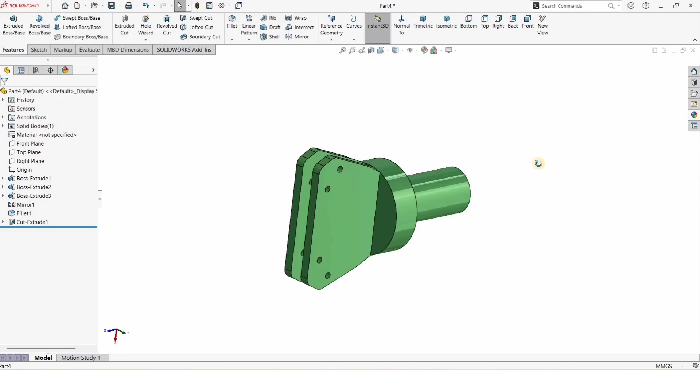Hey everyone, and welcome to this robotic gripper tutorial in SOLIDWORKS, in which we will model this part of the robotic gripper, which will later assemble with the robotic gripper as well.

So let's begin. Open a new part file, change the background to plain white, and make sure you are working in MMGS as units, which means millimeters. Then click on front plane and click on sketch.

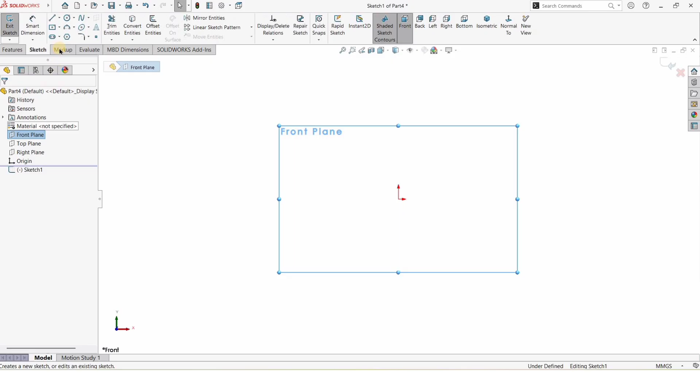Select the circle tool and create a circle at the origin. Specify the diameter of the circle as 50 millimeters. Then go to Features, select Extruded Boss Base, specify the length of extrusion as 101 millimeters, and click OK.

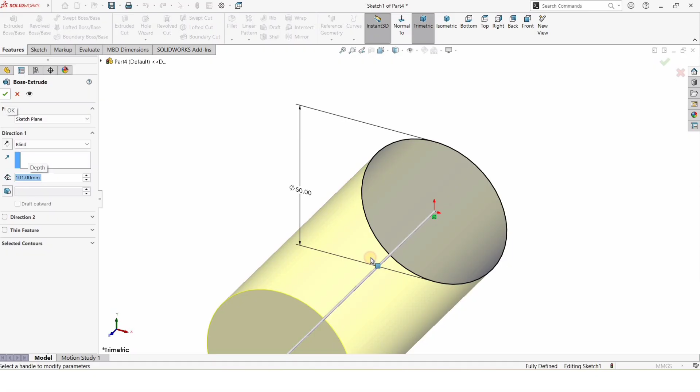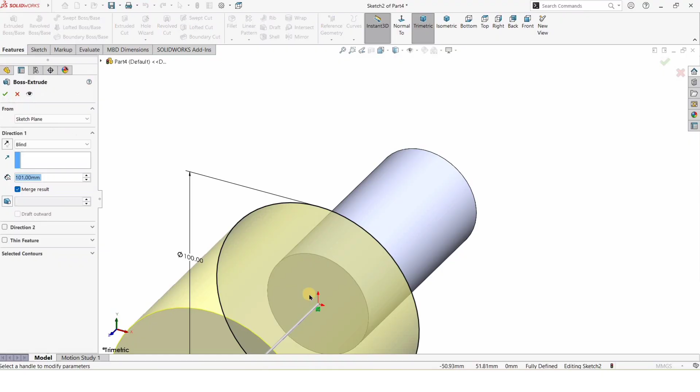Then select this face, click on sketch, and create a circle here at the origin. Specify the diameter as 100 millimeters. Then again go to Features, select Extruded Boss Base, specify the length of extrusion as 30 millimeters from here, and check this box.

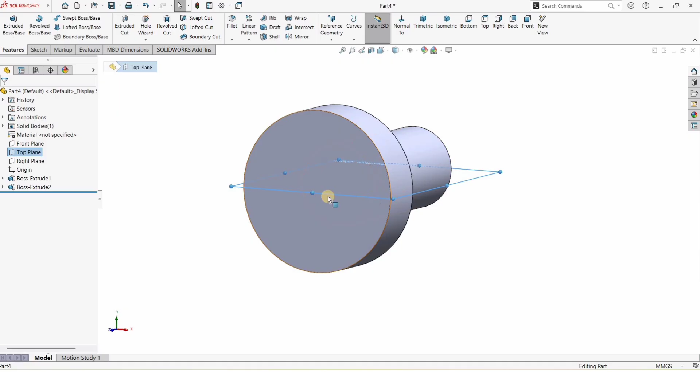Now we need a plane that cuts this part in half. Let me explain: this is the plane, the blue color plane that cuts this part in half. So right click on this plane and click on sketch.

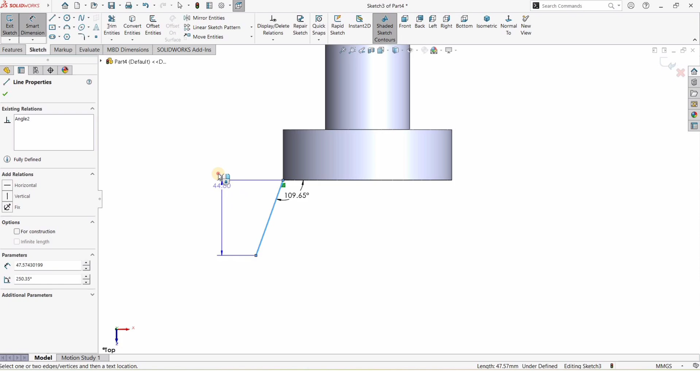I will select a line, and from this point to here in space create a line. Then select Smart Dimensioning, select these two lines, and specify the angle as 109.65. Specify the length of this line as 70.06, making sure it is parallel to the line.

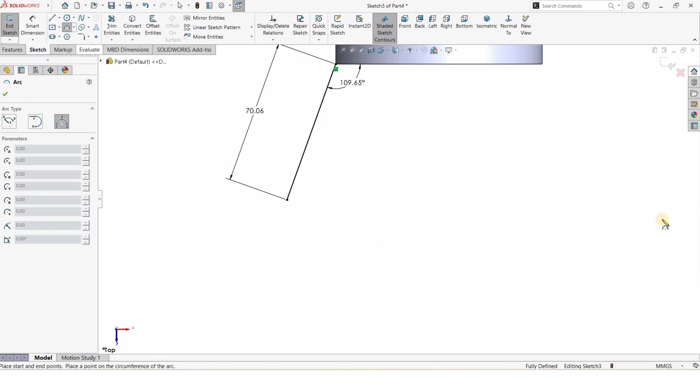Because there can be some other dimension, not this one. Now from here select 3-point arc: first point, second point, and third point. After that, click on this point and make relation tangent.

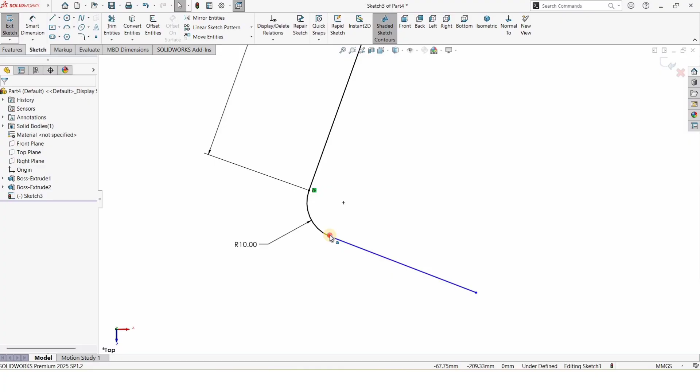Then select Smart Dimensioning and specify the radius of this arc as 10 millimeters. Then select a line and create a line like this. Again select this point and make relation tangent, meaning the line and the 3-point arc have a tangent relation.

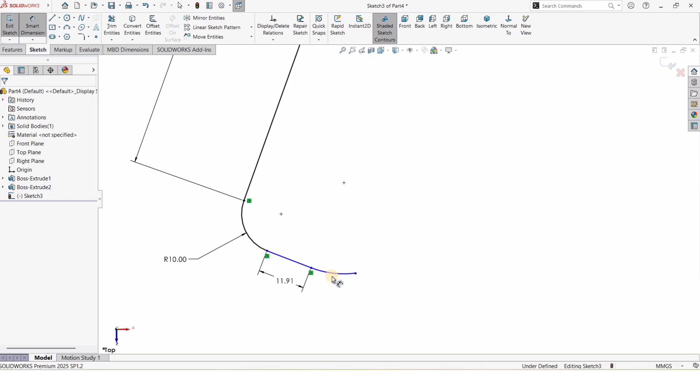Specify the length of this line as 11.91 millimeters. Now we need to create another 3-point arc: first point, second point, and third point. Again select this point and make relation tangent, extend this a little bit. We need to specify the radius of this one as 10 millimeters as well.

Now select a reference centerline and create a vertical straight centerline at the midpoint. Make sure it is vertical by assigning a vertical relation. Then select the line from this point to here, create a horizontal line, and assign a horizontal relation. Then connect these two lines. Now again select this line and make relation tangent.

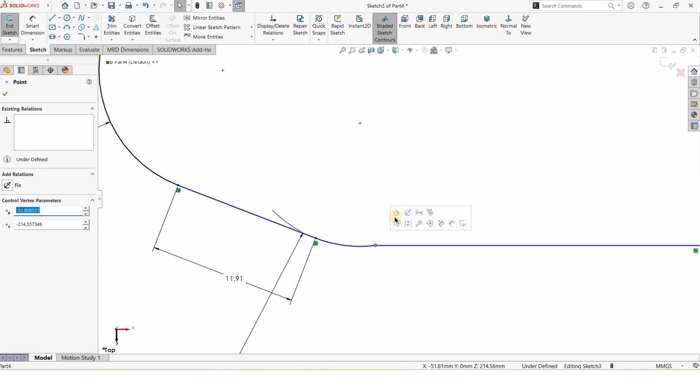Now we need to specify the distance between these two points, and this is going to be 5.53.

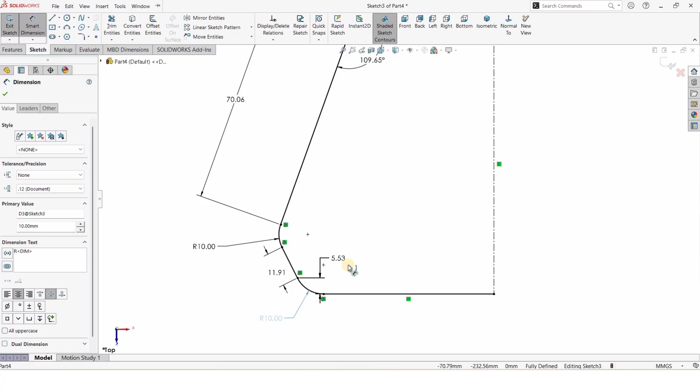Now our sketch is fully defined. As you can see, all the lines have turned black.

Then randomly create 2 circles here, and specify the diameter of both of them as 7 millimeters.

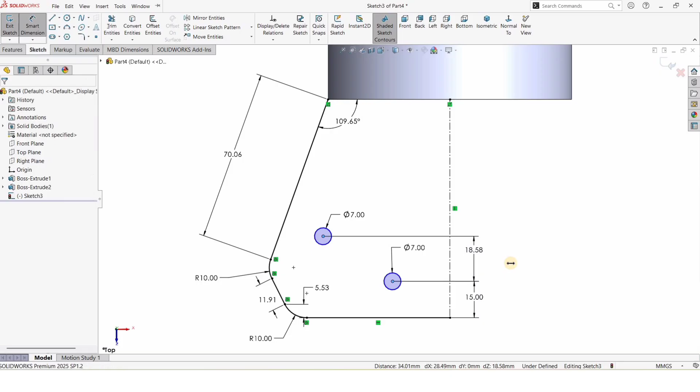Now from the center point of this circle to this baseline, the distance is 15, and from this center point to the center point of these 2 circles, the distance is the same, 15 millimeters. From this center to this reference line, specify the distance as 40. From this center point to this center point, the horizontal distance is going to be 20 millimeters.

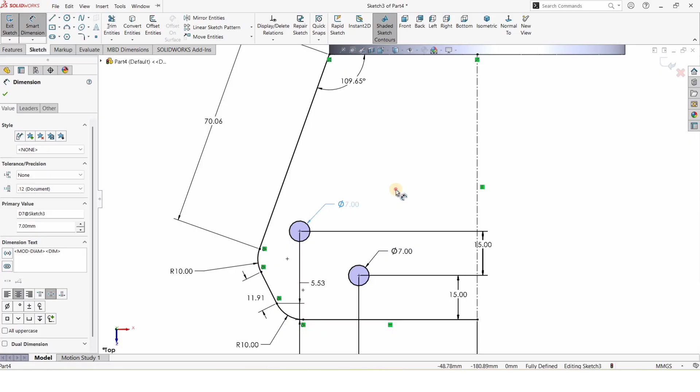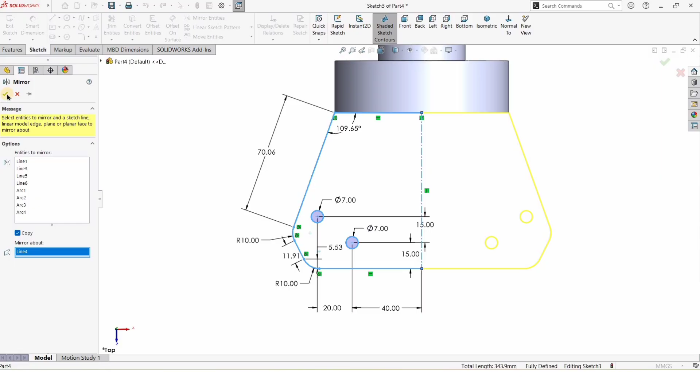Now, to complete this sketch, I will create this line, then select Mirror Entities, select this entire sketch, and in the Mirror About window select this vertical line. The whole sketch gets mirrored like this. Check the box. Our sketch is completed and fully defined.

It's a good practice to fully define the sketches. Go to Features, select Extruded Boss Base, and specify the offset as 7.5, with the length of extrusion being 10 millimeters.

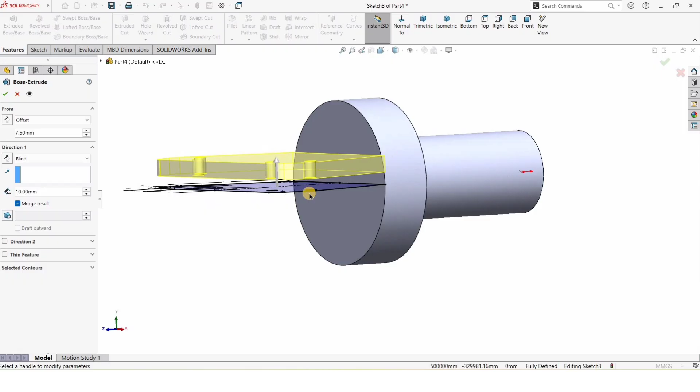Let me explain the offset: the black color is basically your sketch and the yellow color is the material. If you increase the offset, the sketch will move like this. So we want an offset of 7.5 millimeters, and then you can check this box.

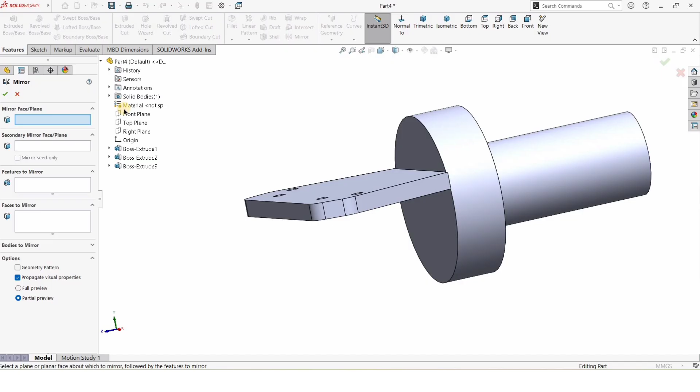Now we want to mirror the same feature to the other side, so select Mirror again. In this window, select a mirror plane first, which is this one in my case. Then for features to mirror, select this feature, and check this box.

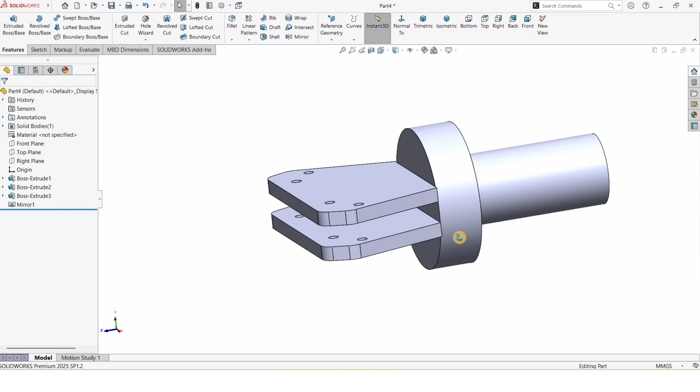As you can see, we have a few edges, so we need to apply some fillet on these edges. Select the fillet tool and specify the radius as 50, selecting these 4 edges. Apply the fillet of 50 millimeter radius to these 4 edges, then check the box or press enter.

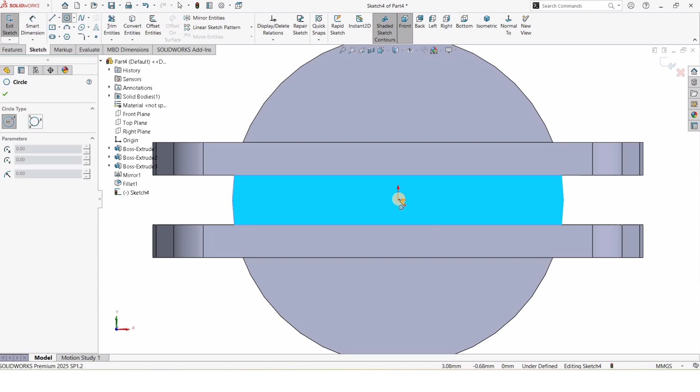After that, select this face, click on sketch, and create a circle here of 10 millimeter diameter. Then go to Features, select Extruded Cut, and specify the depth of cut as 100 millimeters. Check the box.

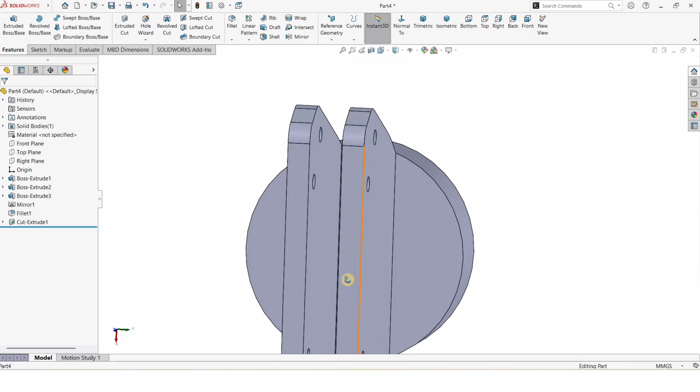Now the part is completed. You can now apply some appearance if you want to. Applying appearance is an optional step, and you can apply any appearance you like.

Here we have our part ready. Now we can save this part, and later we will assemble this with the robotic gripper. Save this part as robotic body and click the save button.